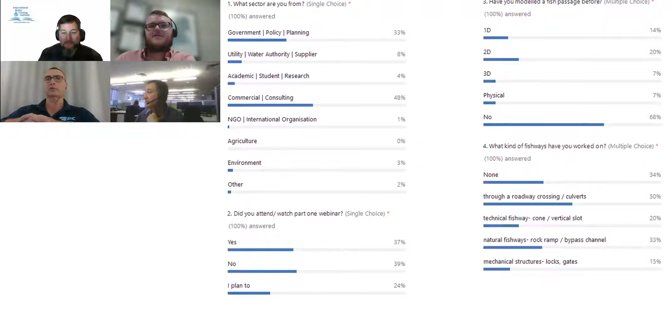It's really interesting just to see how many people are working with road crossings at the moment. It's a real big focus in particularly Queensland. There's lots of fish-friendly road structures going in throughout the state, and it's good to see so many people working on it. Yeah. Great.

So last time around, we did one about a year ago. We did a webinar covering fish passage, and even though some people were coming to you from Australia, it was all American accents, and a lot of people who were involved in Pacific salmon and high jumping species and fish cannons and all sorts of things that we talked about there, the fish ladders.

Some of those designs have been implemented in Australia unsuccessfully and without consideration for the jumping limitations and things like that were local. So we had the request at the time from many of the participants, hey, let's get deeper into the Australian species, being the Australian Water School. So in response to your feedback, we do listen. So let us know what you want to hear more of next year. This is in direct response to the feedback from our previous part 1. Here we are with part 2.

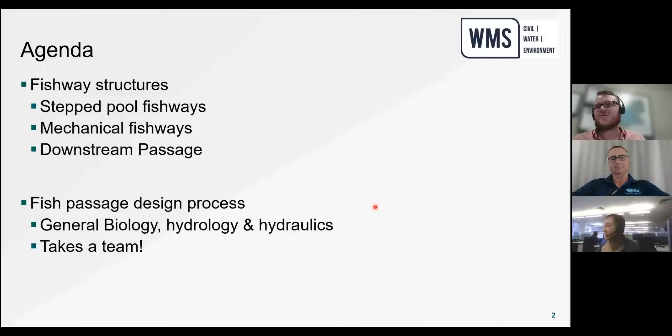So before we get started, I have 3 fishways here. And question for our audience, which one of these was built in Australia? So the first one here on the left, this is a vertical slot fish passage constructed next to a waterfall. And what's quite nice to see is this calm condition at the entrance. So fish, as they approach, ideally they'll find that calm condition and work their way upstream. The steps are quite steep between each, so you'll probably end up with higher design velocities.

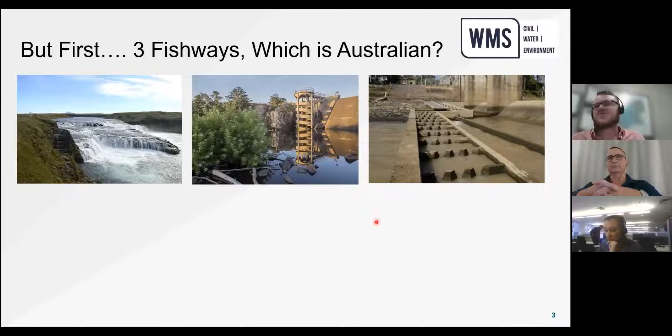Second one here, this is a spiraled stepped weir spillway. Calm conditions again at the entrance, so that's quite nice, but you can see there's quite a steep grade going through that spiral. And the third one, this is a cone fishway connected to a weir. Looking at the pool of that cone fishway, you can see it's quite calm conditions, except for that small plunge that occurs at the downstream. So onto the audience briefly, which one would be the Australian fishway?

That one on the left, that's one in Iceland. And those steep steps mean you have very high design velocities, maybe 8 meters or 10 meters per second. So the fish that can get through there, that's Atlantic salmon that can throw themselves out of the water. You're not going to be seeing any of that in Australia. The second one, it's an interesting folk tale online, but apparently that second one was built in the 1930s for salmon passage, but neither the water body nor the dam itself is stocked with salmon or has any salmon. So the online story goes that that's a nice paperweight, basically. It's a good reminder to think about your biology before you dive into any of this.

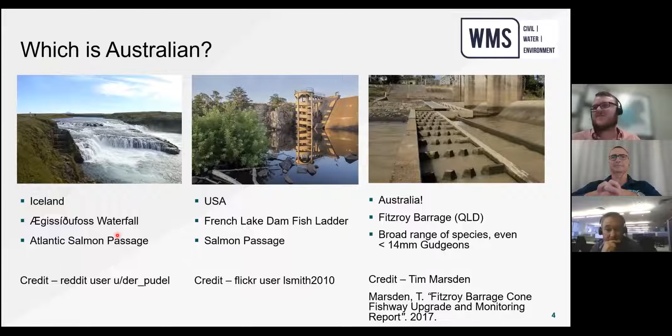The last one, that's the Fitzroy Barrage. Credit to Tim Marsden, that's from his monitoring report. Basically, those calm conditions mean a lot of biomass can make their way upstream versus, I guess, that Iceland one, designed for a specific species and a specific age range.

Following up with Something Fishy part 1, there was talk about culvert design in the US. If you're doing culvert design in Australia, there's lots of great resources you can look to. So starting from the literature, Hubert up here at UQ, he's put a lot of effort into giving guidance and doing a lot of physical modeling around fish passage. So lots of good reading there.

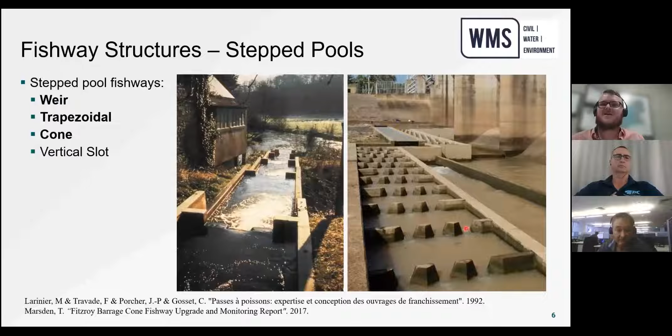But looking between the two, you can see all that white water and high velocities. That's no good for fish in Australia because, again, fish can't throw themselves out of the water or swim against high turbulence or high velocities. This looks a lot nicer, that cone fishway. The hydraulics are pretty straightforward.

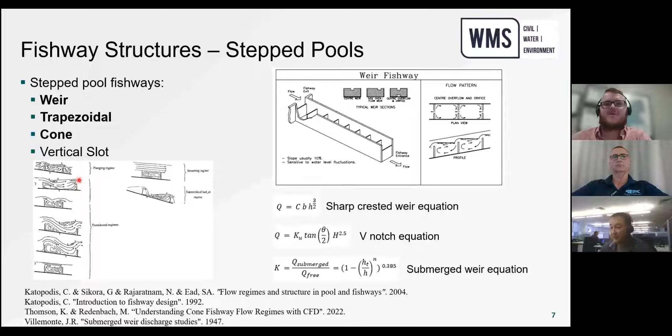If you have a flat weir, it's just that sharp crested weir equation. If you have a notch in the weir, you've got to include the V notch equation. And as your water level, I guess this is supercritical flow, but as your water level begins to pick up on the downstream end and your weir starts to get submerged, it's important to consider submergence as well.

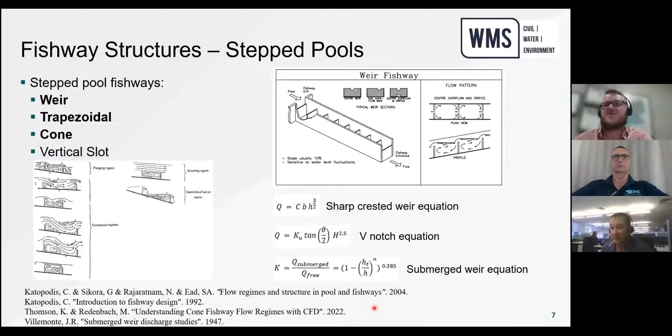Lots of good references here. Katopodis, he spent, I think, 20 plus years trying to quantify these different flow regimes properly. So he's got a lot of work out there. Villemonte equation, if you want to read more about the submerged weir equation and getting that n value right, the n can trip you up. And I've got a paper coming out in the Hydraulic Structures Symposium later in the year that tries to do the big literature review and quantify all of this. So lots of good reading here if anyone's interested.

The hydraulics through a vertical slot: that vena contracta, that's that velocity max that happens just downstream of the slot. That's just root 2g change in head between the slots. Your flow rate, that's just the coefficient of discharge by your velocity by area. But the CD is important to get right. If you have a steel plated baffle through your slot, you can have a much lower CD.

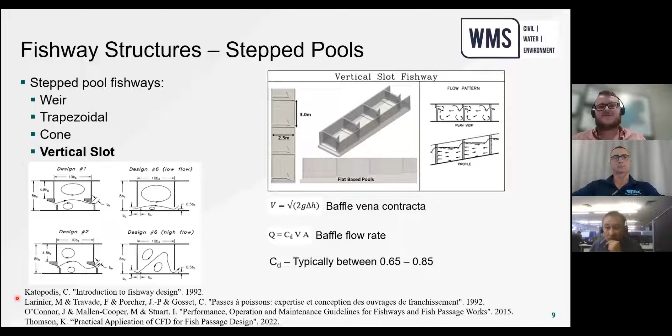These two are the most common in Australia. That's your solid concrete baffle and your vertical slot baffle. The reason being, if you have something like this, all of your turbulence ends up getting focused here, and your smaller bodied fish can't actually find these slower moving parts of the pool. So evenly distributing, it's very important. Lots more references here. I think we'll link them at the end so people can dive in if they're interested.

Locks are very different. They're typically semi-automated, and these come into play when you have a large dam wall and building something like a vertical slot isn't practical. Because when you're building a vertical slot, you want calm conditions, some low steps between each pool, and sometimes it's not practical if the dam wall's 20 meters or even above 8 meters. Can't imagine how many steps you'll need to get upstream.

So how locks work, again, artificial attraction is created and hydraulic conditions are checked so you don't end up killing fish. The lock shuts, fish work their way upstream, and then the lock opens later to allow more fish to enter. There's lots of trip ups that can kill fish, so it's very important you get the locks right.

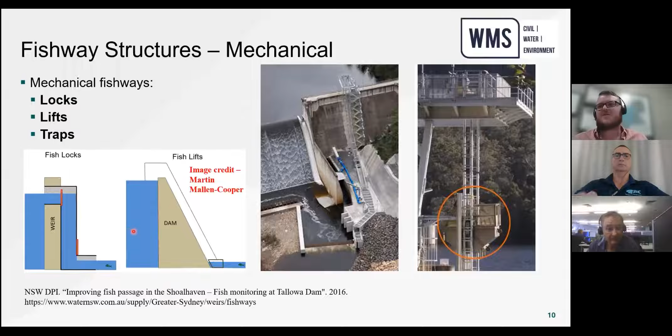Undershot versus overshot. Undershot tends to kill fish just because of large differences in headwater between the two. So if you have a large headwater difference, you can scrape fish along the bed floor. You can cause anything from frictional burn to fish death. So when you're designing, avoid an undershot as much as you can, unless you have very calm or very low headwater tailwater differences, and your biologists are also comfortable with the design. It's important that people that understand the fish also understand the hydraulics so they can make that judgment call.

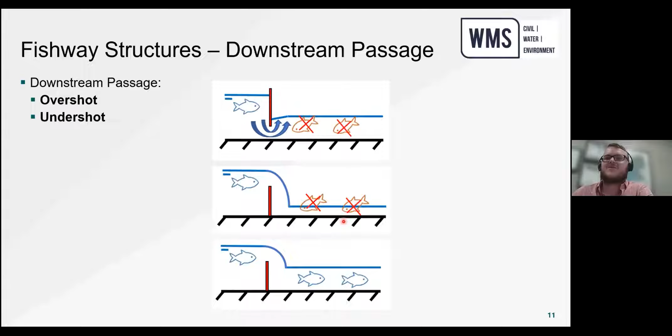Overshots, you don't want a shallow overshot because you end up plunging fish into the ground, and again, frictional burns and possible death. So if you're designing downstream passage, I would always tend to go for overshot with a deep tailwater where you can. The design process for these larger structures can be very extensive. That involves lots of disciplines, but I think Tim will go through it in more detail, so we'll touch on this quite briefly.

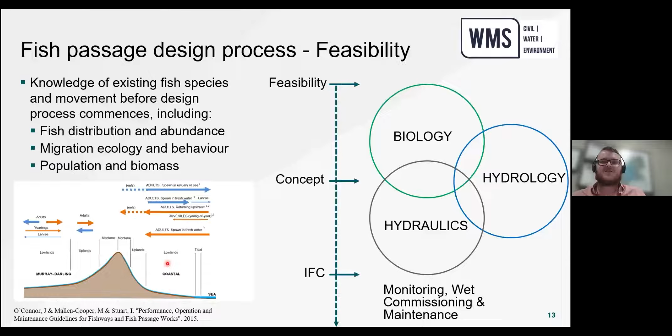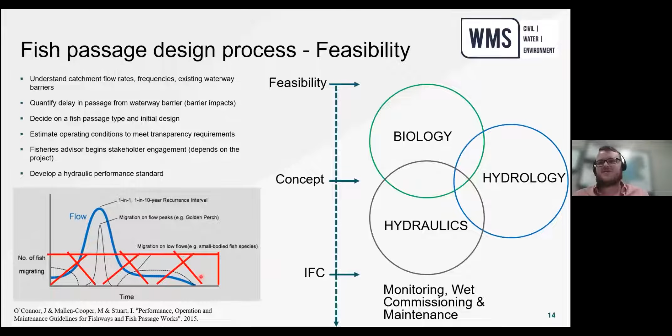Moving from concept to IFC, it ends up being a very large process where you've got to make sure your entrance attraction's right, because if the fish don't get to the fishway, they won't migrate. You've got to make sure that the internals are optimized if you have gates or locks, that you're not causing harm to fish. And if you're doing the CFD stuff, there's a big optimization process you can take to maximize that biomass moving upstream. So I think that's it for me.

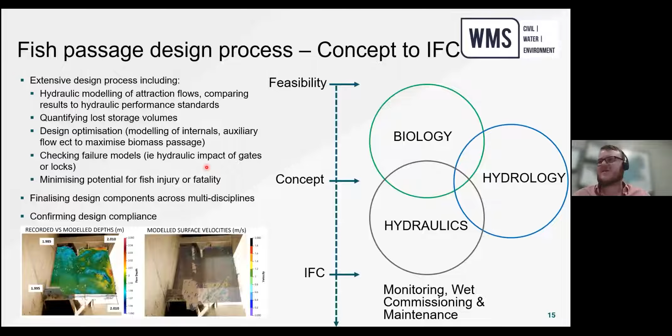On to you, Tim. So yeah, today I'll just give a bit of a background on fish passage and migration in Australia. We've been working on fish passage for a very, very long time in Australia. It really wasn't until the early 1990s that we kicked off with some good studies that actually enabled us to determine fish passage for Australian species. Prior to that, we were importing technology that was less than successful at passing fish upstream.

So why do fish undertake migrations? Well, in Australia, we're basically a country of drought and flooding rains. And so our fish species have adapted to these conditions. Fish are restricted down to the last refuge holes during drought conditions. And then under the next flood conditions, they really take advantage of the ability to move to new areas that might not dry out next drought to maintain their populations. This movement between refuge holes up and down the river system is really critical to maintain their populations. And so we tend to go through a bit of a boom and bust cycle with our fish communities, and that's really driven by their ability to migrate.

If fish cannot migrate to a section of the catchment that has dried out, we're no longer able to repopulate that section of the catchment. And so it's critically important that the refuge holes are protected. And then when the flows come back to the waterways, that the fish are able to move from the refuge holes that they've survived the drought in back into the other habitats that are within those river systems.

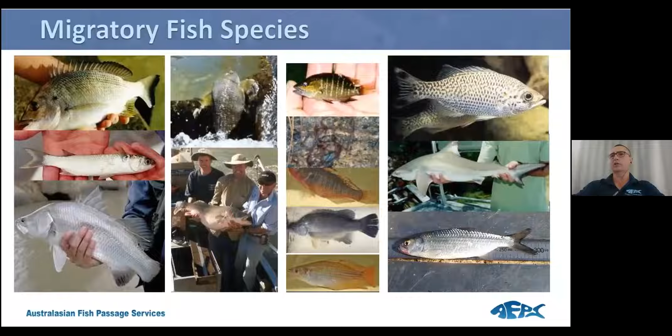And when we're talking about these fish communities and what sizes we're looking at, we're talking about everything from these tiny little gudgeons on the right that are streaming through the Fitzroy Barrage fishway that Kyle showed earlier, so these are tiny fish that are around about 10 to 12 millimeters long, right the way up to juvenile, sub-adult sawfish, which are probably in the range of 1.5 to 3 meters when they're migrating upstream. So, that can be quite a difficult aspect of being able to provide fish passage for giant sawfish and small juvenile gudgeons moving upstream.

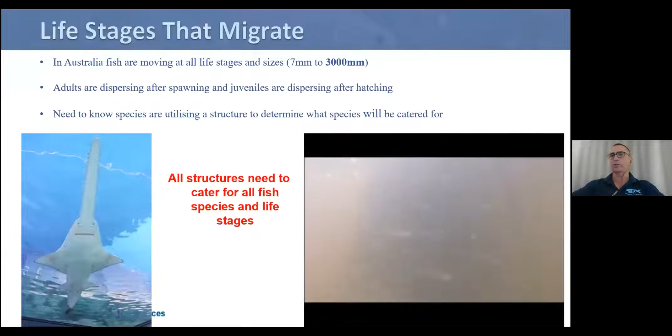So we've got a lot of adults that are dispersing to go spawning, and we've got a lot of juveniles that are moving from their spawning habitat into rearing habitats where it's safe and they can get access to food so they can grow sufficiently. And so we need to know what species are in our waterway that we're working on and what sizes we're catering for to make sure that our fish passage is the right sort of fish passage.

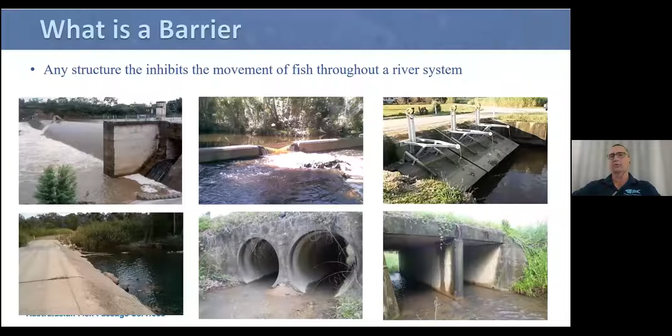So what is considered to be a barrier to fish migration? Basically, any infrastructure that sits in a river and intersects with that watercourse is likely to be a barrier to some fish at some point in time. And so, whilst it's fairly obvious that the big weir there on the top left of the screen is a major barrier to fish migration, smaller barriers such as the small weir in the middle right there, the pipe culverts at the bottom, and the floodgates top right there, those also form barriers. They might not be a barrier 100% of the time, but they're probably going to be a barrier for a large portion of the time that fish are moving within these river systems, particularly on medium to moderate flows.

Vertical drops, water turbulence, swimming through very long, smooth surfaces is often really problematic. And also the reduced light levels that we may get in small pipes and things like that can also be problematic for fish. And so all of these things stop fish from migrating upstream.

So what are the solutions? How do we fix fish passage? So, we always start with a stepped process. The first one we look at is, can we eliminate this barrier completely? Is it a used barrier? Are there other ways that we can do this that would provide passage without creating the barrier?

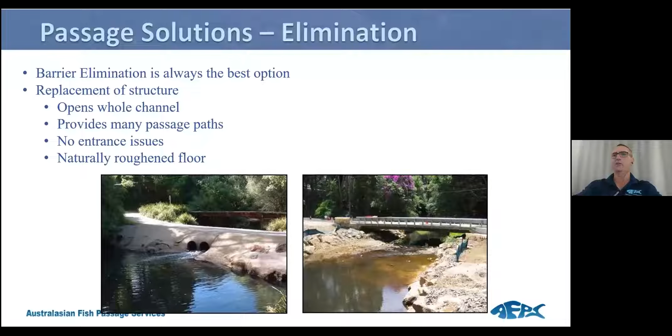So these fish are able to get through that structure quite easily. So elimination is the first option. If you can eliminate your barrier, happy days. Then we may go to sort of the next level, and that's incorporating best practice design into a structure.

And this is particularly relevant in road infrastructure, where you're able to provide passage at some point during the flow regime. But with poor design, that might be 99% of the time no passage and 1% of the time some passage. Whereas with good best practice design, you might flip that around so that you've actually got 99% passage all of the time and only brief periods when there's no passage.

And that can be done by making sure that the culverts, for example, cover the full width of the channel, that there are baffles within the culverts that break up the flow and create low velocity zones that fish are able to use against the walls, making sure they've got a natural bed within that system. So by doing those things within these sorts of structures, we get that best practice design in place and create suitable fish passage conditions for fish.

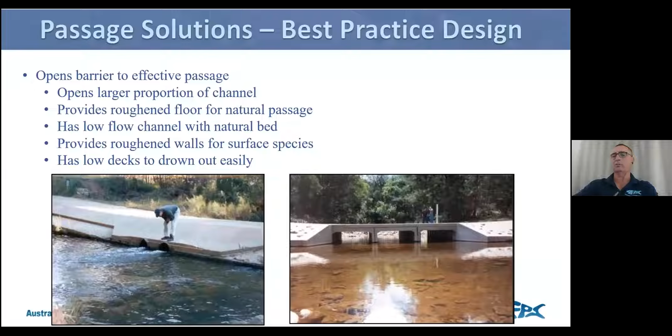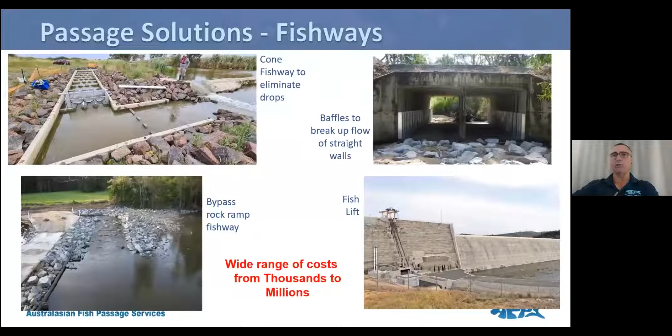It could be baffle culverts and roughening of beds of existing structures within the culvert system. And then there's more technical fishways, such as the fish lifts and fish locks that Kyle was showing us before. You need to be aware of all of these options and how they may work with your structure, purely because the cost associated with these structures is so broad. The rock ramp fishway might be able to be done for tens of thousands of dollars, whereas when you're up in a fish lift, fish lock, you're probably into the millions of dollars.

And so just going back to Kyle's hydrology, the biology and the hydrology are what drives your design. And so when we're looking at our flow, we're looking at the drown out of the structure. How often is it drowned out? How long is it drowned out for? What then becomes a realistic upper operating range of the fishway? Probably in most scenarios, we can't make a fishway operate over the entire range of flows.

So there's periods, once it's drowned out, fish are able to move past the structure. We don't need to make the fishway operate then. So we try and drag the fishway operation down to an acceptable upper range of operation. And then also we make sure that the fishway is able to operate all the way down to the lowest flows, because even though there's less fish moving on those flows, we still have significant movements occurring on those sorts of flows. And so this function of the hydrology really drives the design that we might be looking for at our fishway.

And in some instances, where you have very large structures and a very large range of flows that occur at these structures, it may actually be cheaper to build two fishways rather than trying to squeeze that range of operation into one single fishway. And so what you're trying to do is make sure that your fishway operates for the greatest period of time you can possibly get. Ideally, the lower range of the fishway is at commence to flow in the system. The upper range of the fishway is right at drown out of the structure.

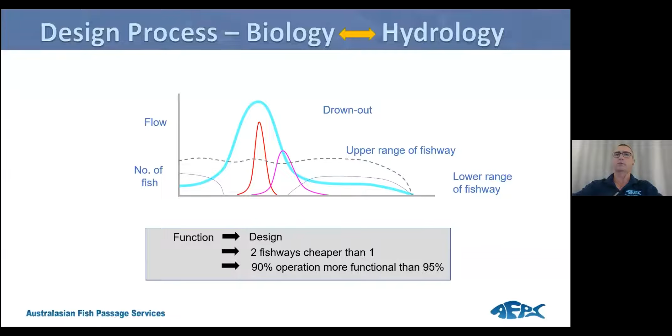And so then you've got fish passage available via the fishway from low flow to drown out, and then via drown out of the structure above those flows. And so that combination of the biology and the hydraulics and the hydrology really drives the function of your fishway. And then that feeds into the cost and conservation values that you're trying to achieve with your fish passage. That drives your capital cost and the operation and maintenance costs and your design life. And it leads to each of your structures having a very unique solution that's based on the site and the characteristics of the catchment and the fish communities that are associated with that.

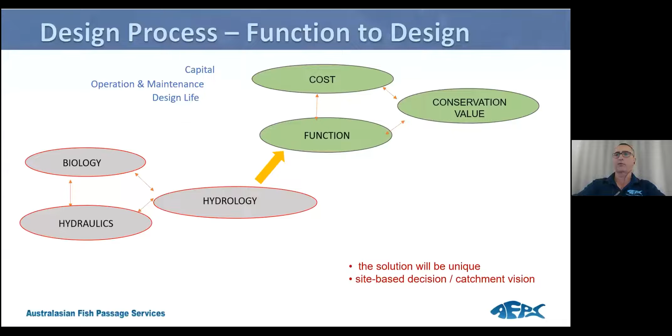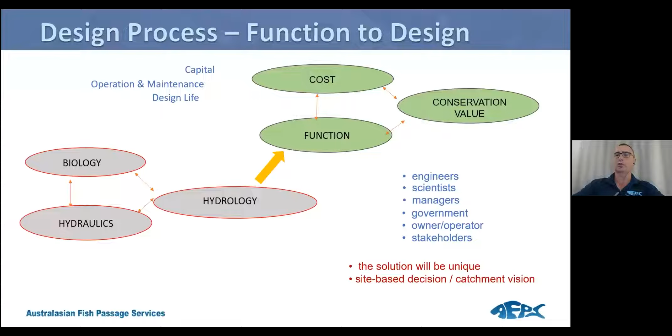And to make sure that that happens, we need to make sure that we have a range of stakeholders engaged in our design process to make sure that we can take that biology, hydraulics, hydrology, the cost and the conservation outcomes that we're looking to achieve in our fishway, make sure all those stakeholders have input into our design to ensure that it gets the right fish passage solution for our site.

And so to get from our concept design through to our final design, we need to make sure that we have this team of engineers and scientists, biologists, the owners of the structure, the operators of the structure, all working together to come up with a design that actually works for them. We need to consider the hydrology and biology and how that fits into the operation of the structure and how this moves forward. Often you'll have a site visit.

It may be in person, or it could be a virtual one like this 3D animation on the right side there. And that gets everyone engaged, makes them understand what the structure is about and how fish passage may be able to insert into that structure. And that allows you to then workshop through the designs, maybe do some multi-criteria analysis on the various designs that are available for that structure to come up with the best fish passage solution, that shows you the transparency of risk of the different designs, which ones operate on which flows over which period and pass which fish. Being transparent about that's really important, and that allows you to ensure that the expectations and outcomes that people have for the project are being met.

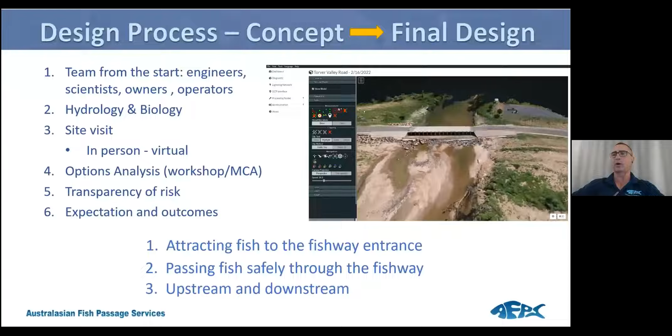So in general, the concept to final design starts with attracting fish to the fishway entrance, passing those fish safely through the fishway, and ensuring that there's both upstream and downstream migration pathways for those fish.

I'll just put in a little bit of a plug. I know Kyle and Steve will talk about some physical models and modeling. One of the things that we've been playing with a little bit is 3D printing as a rapid design technique that allows you to rapidly change the design, throw it into a flume, and do a small physical model on the spot sort of thing. And we've found that this is really useful to get us from something that's maybe not quite right to something that's working pretty well pretty quickly. Often when we go into the CFD and the physical designs, they're a bit more expensive and sometimes time consuming, and having a head start by doing some of this rapid prototyping with the 3D modeling can really help to get those processes moving that little bit quicker in time-sensitive projects.

So in conclusion, I think fish passage should be incorporated into every weir, dam, road culvert, and it's just an integral part of the design of those projects. We need to make sure that we've got the attraction of the fish to the fishway or fish passage elements, and that the passage through those elements is successful. And that requires teamwork from engineers and biologists, working from the business case. And this is a really important thing that I'll really highlight. Making sure that you've got your engineers and biologists working on fish passage at the business case stage of your project ensures that suitable fish passage is included early on and that there's no nasty surprises later on.

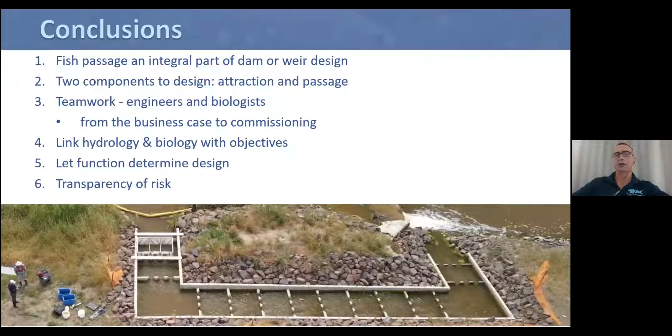We have a lot of projects that don't consider fish passage particularly well in the business case and might put a nominal value on the fish passage, and then when they get to their approvals process, find out that they're up for much more significant fish passage than they expected, and of course that gets everyone in a tizz because their budgets have been blown out. If that budgeting is included in the business case early on, you don't have that many issues associated with that. So I think that fish passage should be included. Everyone should look after it, and I think the modelling that Kyle and Steve and whatnot are doing is really helping us to understand how these fish are getting upstream. So I'll leave it there.

Okay, I'll make a start. Let's get cranking. Thanks, Greg. And thanks, Tim, and thanks to Kyle.

Look, I think Tim had some very good points about the cooperative approach to fishway designs, and I think I'll touch base on that over the next 10 minutes or so. I'm going to look at a specific aspect of fish passage design, which is getting the fish in the entrance, getting them to find the entrance and go in, and also when they get to the top end and come out, so they don't get returned back downstream, so they can safely go on their journey upstream.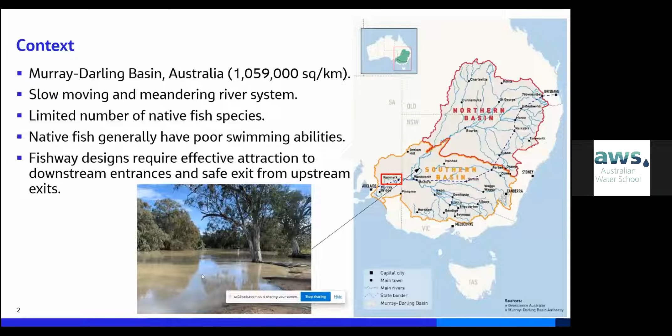This little blue line basically shows the route I actually drove about a week ago to get from Adelaide. Brisbane was 2,000 kilometres, so it's quite a long way. And here's a picture of the Darling River just last week with some overbank flow happening.

Some of our fish, we have small, medium and large size fish, but anywhere in the river system, typically we're getting only about 12 to 15 species of fish. So you can see at the top there, we have a small fish, about 30 millimeters. And then we have a bony herring at the right there, which is a medium-sized fish, going up to larger fish species like silver perch, golden perch being one of our more iconic species, and our very iconic species being Murray cod. This one's a small cod, but they actually grow up to about a metre plus.

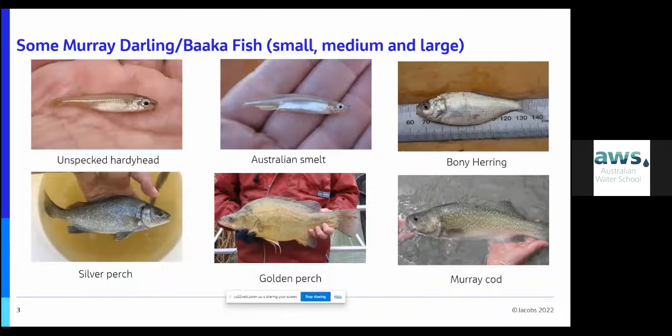So fishway attraction. So what are we trying to do? We're trying to get the fish to go in the entrance of a fishway. And there's two key rules. One is that the fishway entrance must be at the limit of upstream fish migration. So that's either a physical barrier or a zone of turbulence that the fish can't pass. The fish will go left and right across that zone, and then needs to find the entrance. If the entrance is too far downstream, the fish will go past the entrance and won't find it and won't go in.

Conversely, if the fishway entrance is too far upstream and it's shielded by turbulence, the fish can't find the entrance again. Also, fish must follow positive attraction flows to locate the entrance. So this basically shows a site here down in South Australia. We've actually got a submerged nib wall under this structure. We have two overshot gates with some high turbulence behind the nib wall.

And here's my little Murray cod coming up the stream. They're actually hiding below the bottom of the nib wall. They won't go into that zone of turbulence because you can't stay in there very long because it's too turbulent. And they pick up the flow out of the vertical slot fishway entrance, and then they go. So that's what we're trying to achieve. And there the fish were shooting below the nib wall there.

So a worked example is the Pike and Tanyaca regulators and fishways, which are at Renmark here. This scheme has two similar structures with gates, bridge and vertical slot fishways. And the scheme is to provide managed inundation watering of the Pike floodplain down by Renmark at Lock 5. So you can see here that we have the regulators, and you can see the fishways at the abutments there, vertical slot fishways, and they're low turbulence fishways. We're trying to get small fish about 30 millimeters through there.

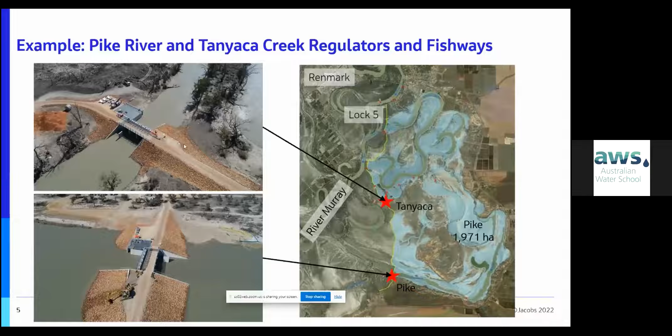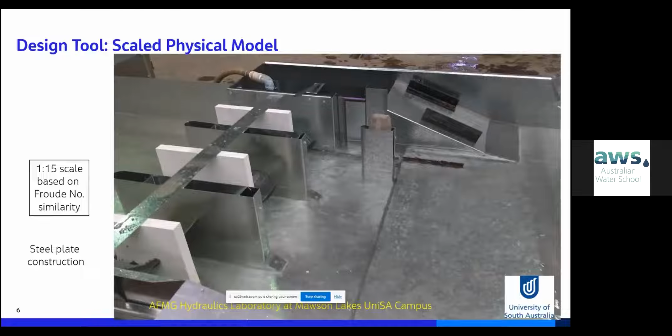So how do we do this design? We actually used the University of South Australia Australian Flow Management Group to construct a 1 in 15 scale physical model of our concept design, and that had lay flat overshot regulator gates made out of steel plate. And the features were the entrance and the abutment. You can see the vertical slot there.

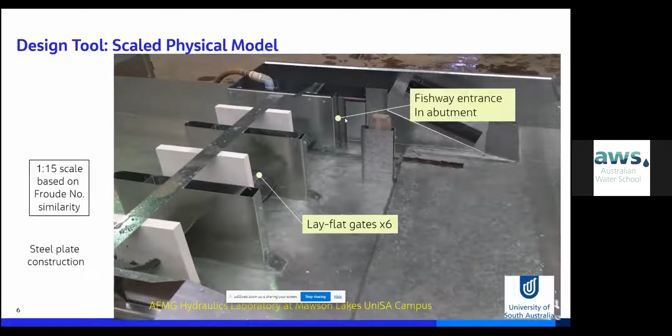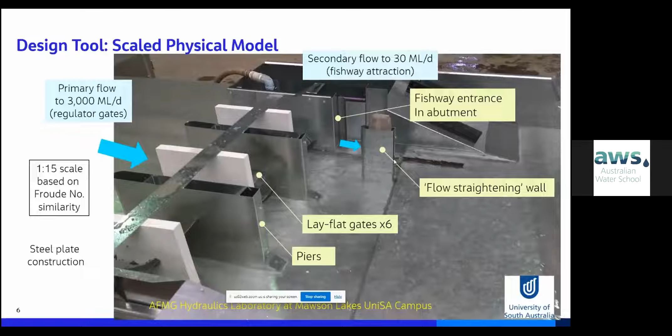We also had 6 lay flat gates, some piers, a flow straightening wall because we're trying to protect the flow vectors at the entrance. We had a primary flow from a primary pump coming through, and we had a secondary flow simulating the flow out of the fishway. And so what we did with our physical model, we just modeled a whole range of flows and water levels to optimize our entrance conditions.

The key attendees at the modelling are the designer, the fish ecologist, the owner and operator, and other key stakeholders and approvers. This is very important and touches on what Tim was saying: it's important that the ecologist understands what we, the engineers, are actually designing.

That relationship is very important, and using any model, let's say a physical model or a CFD model or any kind of design, it's really important that the modelling represents what the fish are actually going to do and go in. Because if not, you've got a many-million-dollar fishway that's going to be built. If the fish can't go in it, then it's a failure, and we don't want that.

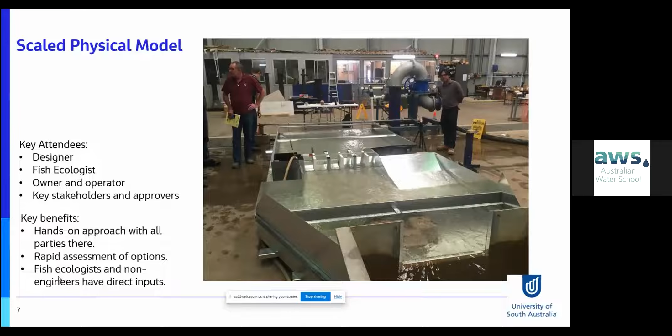So the key benefits of the physical model here: we actually had a hands-on approach, and you can see we've got engineers, and there's the client standing at the left. We had a rapid assessment of options once it's built. This model had a lead time of about 6 weeks and about 2 days testing. And of course, the fish ecologists had the inputs. And there we had our primary flow, our secondary flow, a surge tank to take out the surge upstream, and regulator gates and flap gates.

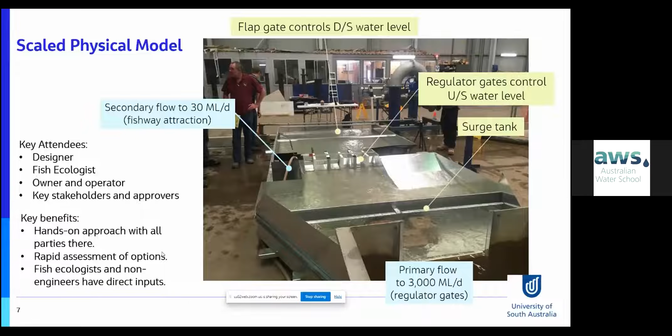So with our flows, basically what we were trying to do is get the fish to go towards the entrance there. So we operated the gates near the entrance, and we adjusted the model to get the attraction flow there. So the fish moved up. We incorporated a nib wall, and we had a zone of turbulence which the fish would not go in. And here's our fish swimming upstream, and in they go.

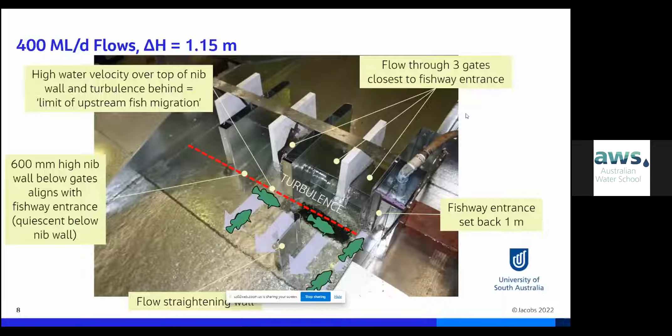So these were the kinds of things that we were putting into our model to get our fish to find the entrance and go in. And of course, on the upstream side, we also looked at: are they going to come out safely and not get returned back downstream?

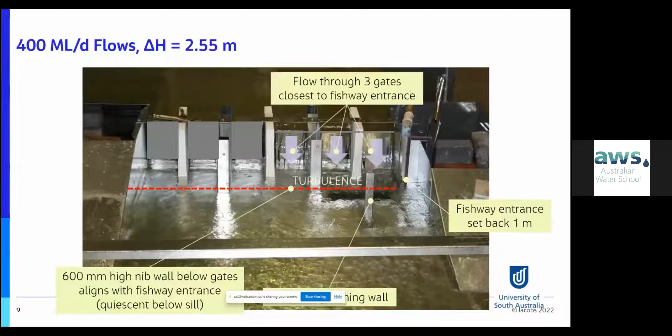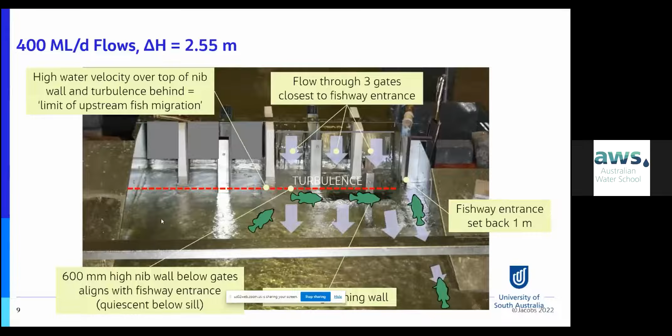Here's a scenario for a higher drop, but showing a similar kind of thing there with turbulence, flows, and high velocities over the top of this nib wall, and the fish would basically come up there and come across and go into the entrance slot. And again, we also did flood flows as well.

And you can see that we actually have something that's very flexible. So we were able to cut and shut the model to get the entrance slot in the right location, but also to change all the gates and flows and settings, so we were comfortable that the fish are actually going to find the fishway entrance for all flows. And this is basically how we set it for that.

And again, here comes our fish. This is our Murray cod. And whilst we didn't put fish in the model, because that kind of has ethics problems as well if you actually put the fish in the model, we just used other instruments, which I'll show in a second.

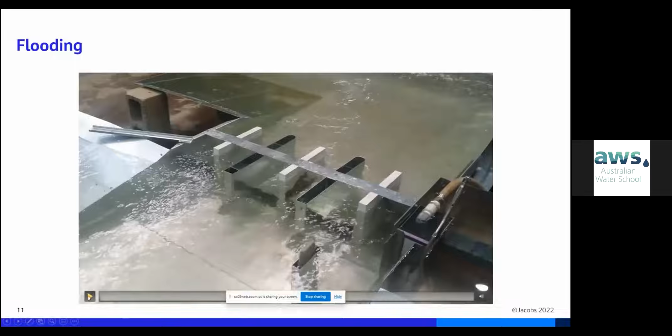So hopefully this will play. If not, it might be a bit too clunky. No, it's a little bit clunky, so it's not going to play. Oh no, there it goes.

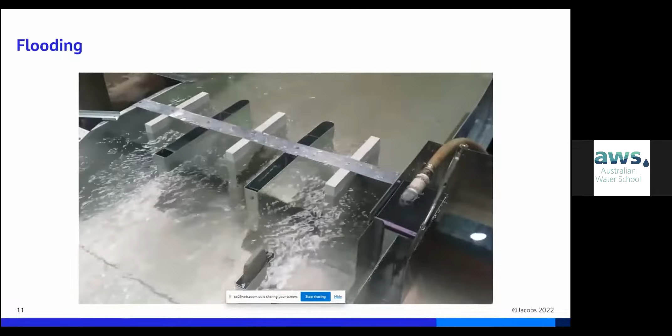So basically, this is just showing the flow running through the model with our gates fully open at a flood. And what we're doing is assessing the fishway entrance for this condition here.

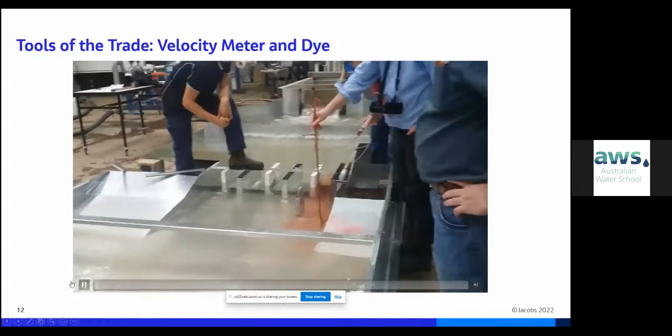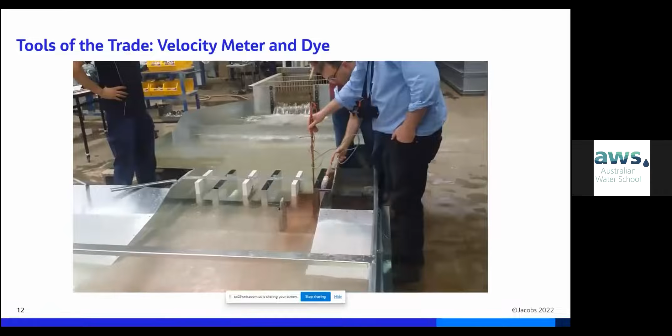Our tools of the trade, and sorry about the jumpy video here. I think perhaps we were a little bit excited, but what we have is Dr. Ivor Stewart standing in the foreground, a fish ecologist. He's holding a velocity meter to assess water velocities and attraction flows to the fishway entrance. And that's me. We're putting some dye into the model to show what the strengths of the flows are and what the velocity vectors are. So we've got integrity of flow below the fishway entrance.

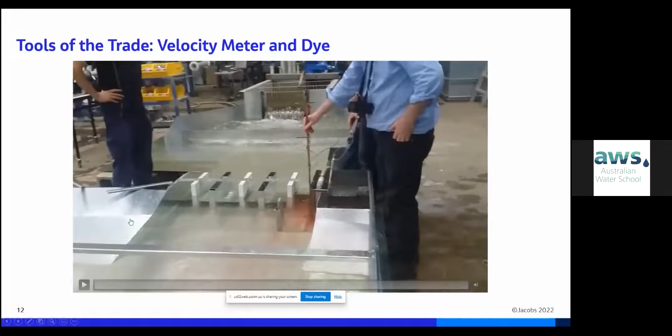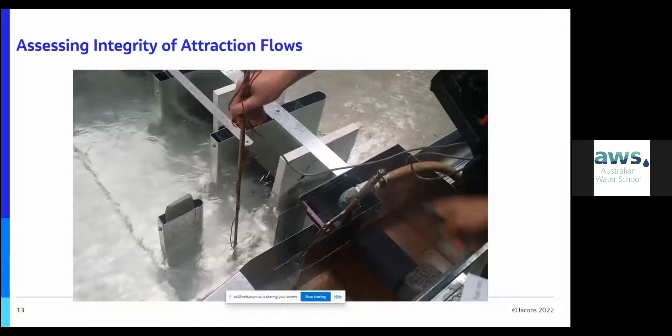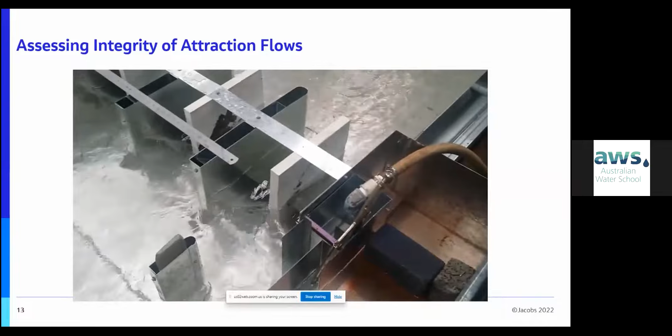And this one's a bit more stable. We're just showing the velocity meter, and we're assessing the direction of the flow. And you can see, with the orientation of the wing walls of the structure and the orientation of the fishway pointing straight downstream, we're getting some very good currents straight downstream of the entrance of the fishway. And we were comfortable through the modelling that we were able to demonstrate that the fish would be able to find the fishway entrance in this model.

So now to our 1:1 scale model after it was built. And what we can see here, this is the Tanyaca structure showing the fishway entrance here at the left, putting about 30 megalitres a day flows straight down the wall here. We've got our 3 overshot gates passing our flows up to 546 megs.

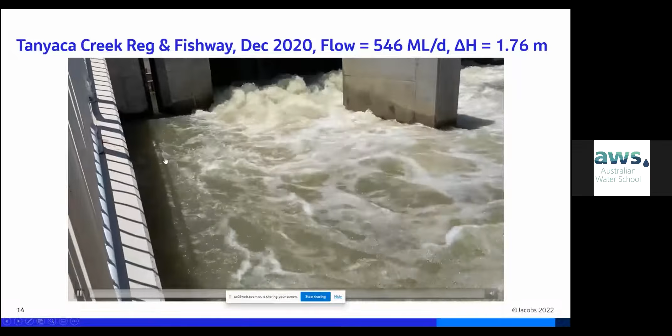So just another one there, basically showing, you can actually just see there's a bit of surface slop there, but the fish will be down deep, and we're actually getting some good attraction flows coming down this wall here. So the fish will be moving along this wall and straight into that entrance slot at the limit of upstream fish migration. So did it work? Yes, it did.

So this is on the same day. I just took that last video, and we had SARDI, who is our local research and development institute here in South Australia, doing fish sampling at the fishway entrance and exit of both the Pike and Tanyaca structures. And you see here that we had a very good range of the target fish species and sizes greater than 30 millimeters of body length.

So we had some bony herring, golden perch, and even Murray cod, which we weren't expecting. And the lady on the bottom right hand there, she's actually holding a medium-sized golden perch, and we had a lot of golden perch through. So, as I say down the bottom there, whoop whoop. It was a good result, and so the process of going through the modeling, then taking it into the design, and then doing the sampling, we showed that we had a really good result.

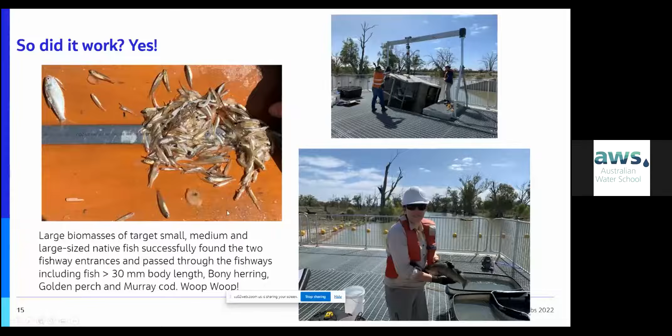So just wrapping up, I've said here CFD or physical model, and I suppose it's, why not both? I think both can be complementary to each other, and sometimes it might not be just one or the other. Both are horses for courses. They're useful tools at our disposal for use in fishway designs, and there's pros and cons of each. Like a physical model does take several weeks to build, but you can actually test it and get through all the regimes and get the ecologists in there.

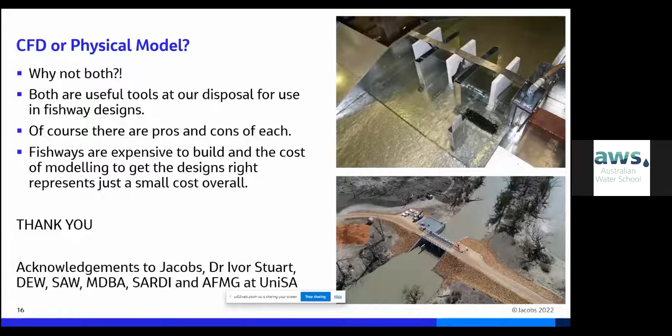But again, they are complementary. CFD and physical modeling can be complementary. But the key one here is that fishways are very expensive to build, typically, and the cost of modeling to get the design right represents just a small cost overall. So, if you don't do engineering with the ecology, also with the operation and maintenance, then you get problems.

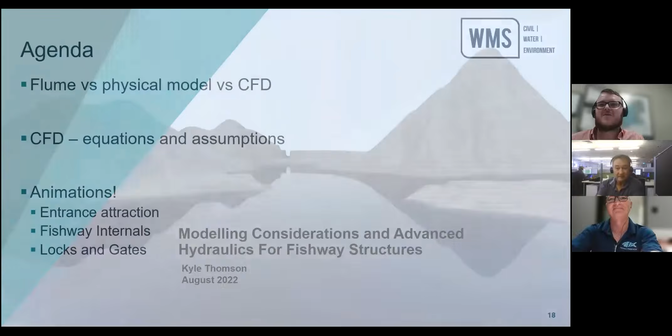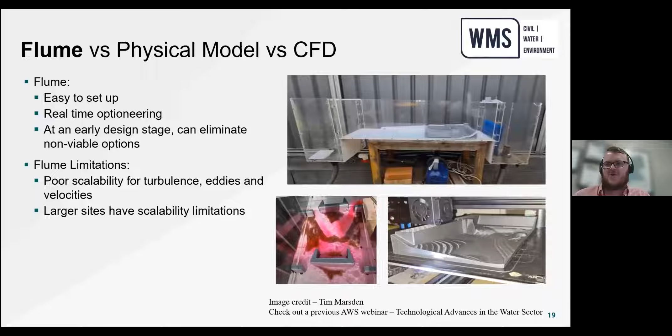He can 3D print a structure, start running water through it, and start looking to see where those eddies and those velocities are going. So rather than building a physical model, which might take weeks, or doing an optioneering approach in CFD, which could take weeks or months, you can kind of knock out those undesirable options early on. And it looks cool as well.

So the physical model, that's the next step up from the flume. Generally physical models, as Steve was showing before, are scaled based off well-known hydraulic principles, whether that's Froude numbers or Bernoulli's equation. Physical modeling goes back probably 100 years at this point. It's well studied, well understood, and using those pressure gauges, pressure sensors, velocity readers, you can extract pretty exact results and then scale those results based on those hydraulic principles to get, I guess you'd call them highly probable outputs for your structure.

Physical modeling can be very expensive. There's real estate costs to dedicate a part of a lab. Materials costs are going up, whether it's concrete, steel, even the finer gauges that are hard to come by now. And you need to have a good lab technician that understands the entire process.

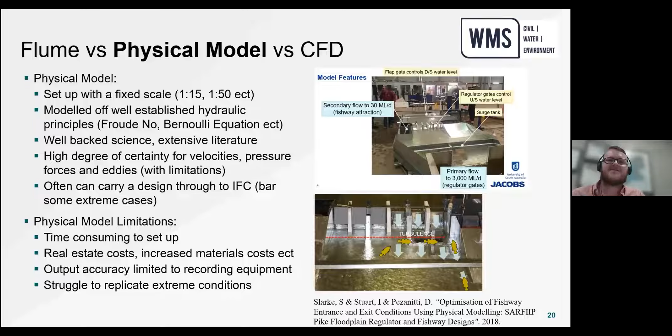So CFD, it can be quick to set up. Let's see if that animation plays. Yep. CFD can be quick to set up if you scale back your solver and scale back a lot of your assumptions. But as you scale those things back, you're creating uncertainty. So you can do an optioneering approach where you're doing, let's say, one optioneering run a day. That's not even close to the Tim flume, where you could optioneer on the fly and do 1,000 tests in a single day. But at least CFD is becoming a little bit more practical.

It can often carry the design through to IFC, but if you're doing an important structure, that large dam, there's a lot of uncertainty, then best practice is to use a CFD model in conjunction with a physical model. When you're doing things like fishway internals or smaller fish or fish passages in general, very rarely would you actually need the physical model to validate the CFD model. With CFD, you can model non-Newtonian flows, sediment transport, all sorts of things, and extract depth varying results whenever you're ready to really cut apart all the finer details.

There was a question about, have best practices been established? And unfortunately, no. In the consulting space, a lot of CFD engineers have tended to keep their findings and the methodologies to themselves, which is pretty unfortunate. But there are government bodies like Sunwater, TMR, at least up here in Queensland, that are starting to do the modeling themselves and starting to establish their own best practices. So I guess, hoping down the track, they'll actually begin to drive how we should be doing the modeling and what the right approaches and outcomes are.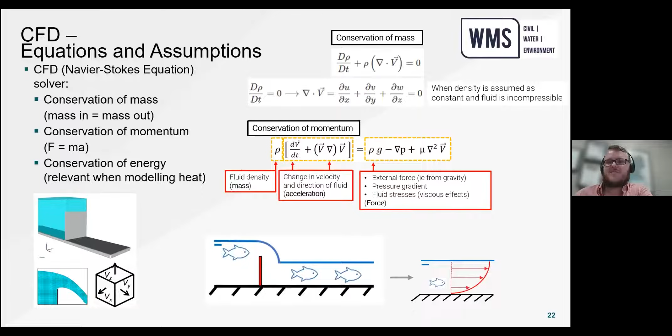I'll touch on 3 things briefly that are coming out in that paper later on in the year. Reach out to me if you want a copy, but 3 things I'm starting to find are really important. You should always check with your CFD modeling is your mesh resolution, your turbulence model, and your wall roughness.

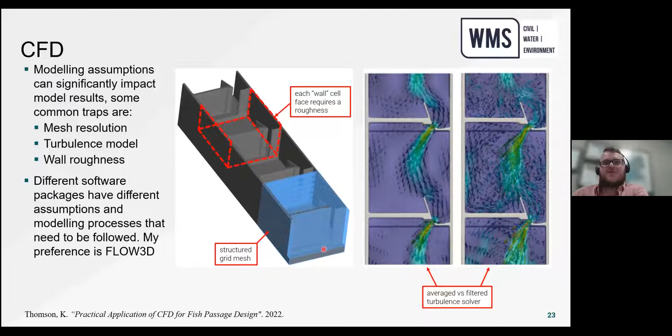Wall roughnesses, it's important to know exactly how your roughness is applied in your model. It's very different to Manning's. I'll touch on it a little bit more. And cell size is important. You need to adequately capture your mesh geometry properly if you have a chance in solving turbulence, velocity gradients, and all these other things properly.

The appropriate mesh is one that captures the geometry adequately, maintains reasonable run times, and provides defendable results. That defendable results portion is very important because you can plug anything you want in a CFD model, get an output quickly and go, that's what it is. But then you'll find out later, you've basically made stuff up for a project. So it's important to do that literature review. There's lots of rules of thumb here to get your geometry right.

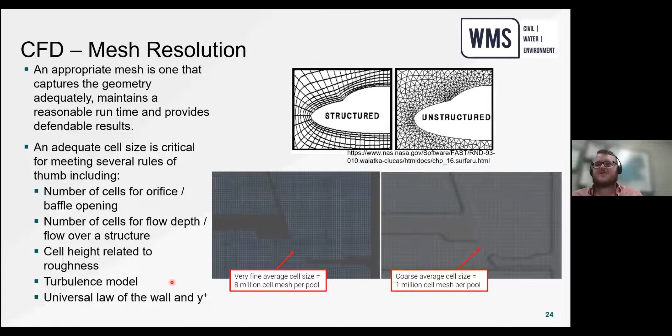And if you look here on the right, that's a steel plated baffle with a coarse cell size. And even though I've captured the baffle shape right, the results change very quickly. And that's because you need a minimum number of cells in the X and Y and a minimum number of cells in your Z to adequately capture that flow gradient properly. I'm not going to touch on it here, that universal law of the wall and Y plus, but those are also important to get that velocity gradient and that pressure gradient right out of the model. And cell size is also solver dependent. So if you're using a different turbulence model, your cell size assumptions can change.

Wall roughnesses start to get very tricky. Effectively, it's a roughness applied to that bottom cell, and your roughness tends to become asymptotic as it approaches the cell centroid. And asymptotic basically means it starts deviating from the value it should be. So getting enough cells in your z-axis is important, but also understanding your minimum cell size to solve that Y plus properly, so you get that gradient modelled correctly, and understanding how your roughness might interact with your cell size, and then how your turbulence model might interact with those cell sizes as well becomes very important. They're not interchangeable, and it's important to understand the differences between each.

There are ways around that roughness limitation. You can actually physically model the roughnesses, or, I've read a few papers where they've put a defined shear force on the bed, and that shear force has artificially created that correct velocity profile.

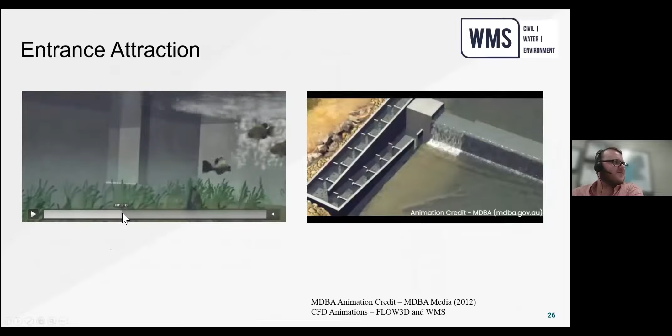Let's look at some animations. There's a nice little video I suggest everybody check out online who's interested. Basically, it's an animation of how fish approach a weir wall, and they find that attraction flow. And when they find that attraction flow, they stay away from the high turbulence, high velocity going over the weir. They enter the fishway and keep migrating upstream.

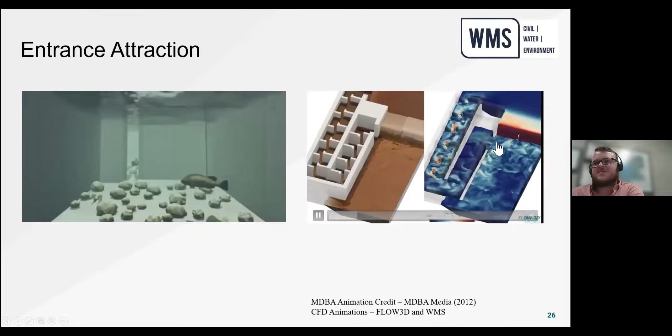So the Flow 3D team, they tried to model that to kind of see how it operates with a partially drowned condition. And yeah, you can kind of see it in action. Water coming over, lots of churning, lots of eddying that then enters the fishway. We tried to do a very coarse optioneering approach to see how it will all turn out. So this is a base case. There's water plunging over the weir. And you can see there's an eddy in that corner as water plunges over the weir.

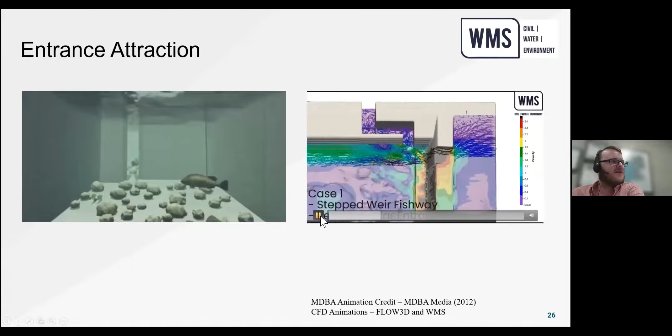So let's say we put our fish passage in. If the fish passage is perpendicular to the structure, you start to get a fairly wild eddy that's occurring at the entrance. So fish aren't going to be able to swim against that eddy. Let's say we open it up a bit more. That eddy just gets bigger. So it's no good. Fish aren't going to be able to break through that eddy to swim upstream.

And let's say if we make the entrance parallel, starting to look a little bit better, but there's still that 0.3 to 0.6 meters per second eddy, so still haven't got there. You can start to see how these projects, if you just go through CFD at the optioneering phase, can create a lot of drag. So now we've added a shallow deflector and we've upped the operation conditions, and the eddies broke, which is nice, but now we've actually created a new problem. All of these greens and cyans, those are high velocity zones. So the eddy's gone, surely the fish will be happy. Nope, the velocity's too high now.

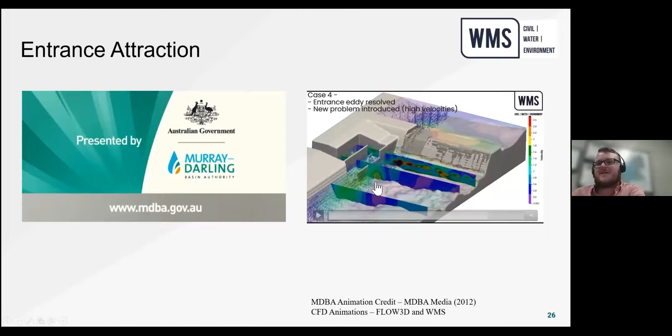Other nice animations, modeling channel flow to work out entrance attraction. I think this is a buried shallow dike, and you can see on the left, it's created a lower velocity zone. So maybe where that plunge is happening, something like a vertical slot or a small structure might be able to improve the fish migration.

Modeling internals. Here's a nice video from Steve, and this is a vertical slot fishway in action. You can see on the right of the wall, the water level is lifting up a little bit. I'll grab the laser pen. It's a little bit of lift up here, and there's that S-shape meandering through. So with the CFD model, it's quite nice because, at least in this case, I think we've got a model agreement of plus or minus 1 to 2 millimeters to the site, which is quite nice.

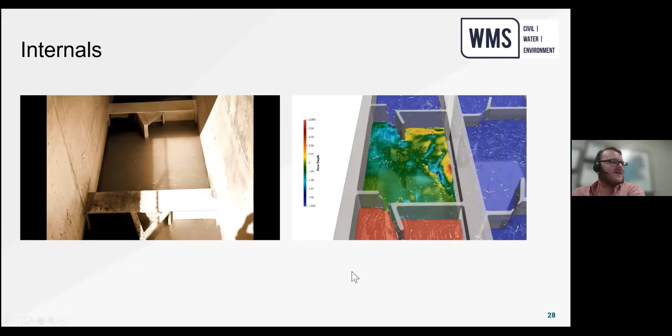With the CFD model, we can model that either before it's built or, I guess, validate the solver to the site data. And from there, you can then extract flows below the baffle inverts to see all those calmer conditions, to work out if juvenile fish can pass upstream, work out where the high turbulence zones are. And I guess that might tie into that optioneering process where maybe you'll change the baffle type, shift the baffles, move the baffles, increase the pool area, pool volume. Once you get that validation, it becomes really nice to, as Tim and Steve would say, chase that perfect structure.

We're almost there, just locks and gates left. Opening a lock in a shallow condition, I mentioned how you can kill fish or cause frictional burns. With CFD, you can extract those velocities and go, all right, that's like between 20 to 30 meters per second. That's no good. Maybe you need additional auxiliary flows pumped in to create a calmer hydraulic condition as the gates open. Maybe that might be acceptable for a brief moment of time, but that really depends on the asset owners and the species you're designing to.

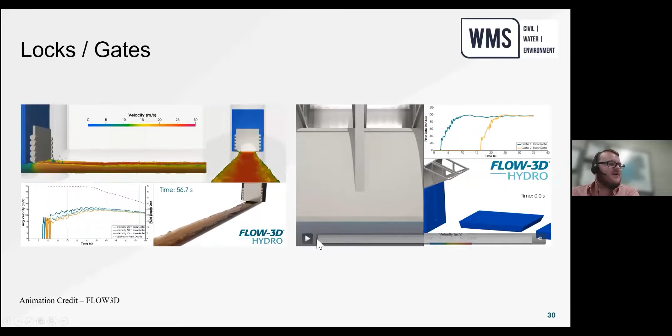Opening a gate into a plunge pool, whether it's fish coming over the gate or fish that are already sitting in the plunge pool, you can work out quickly what those velocities and turbulence zones are, and if they're impacting the fish or not.

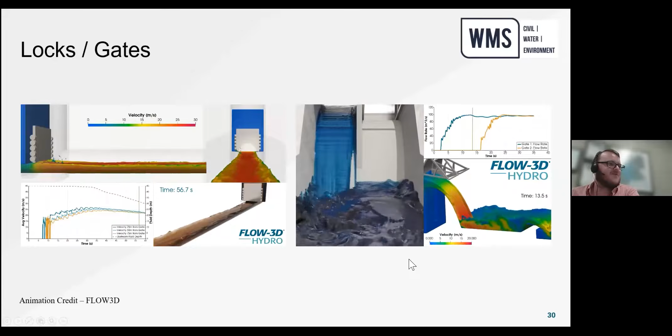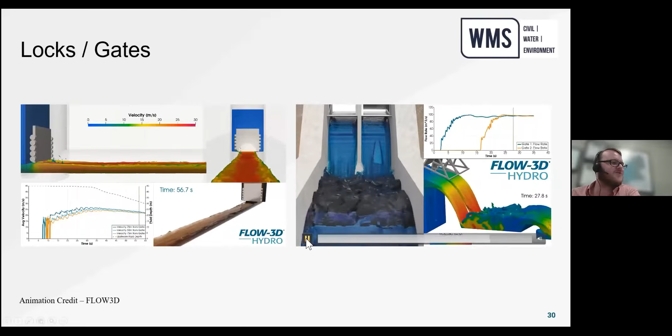Again, we can do all of this as a hydraulic engineer, but it comes down to interpretation by the biologists or the fisheries advisors. And I think that's it for me.